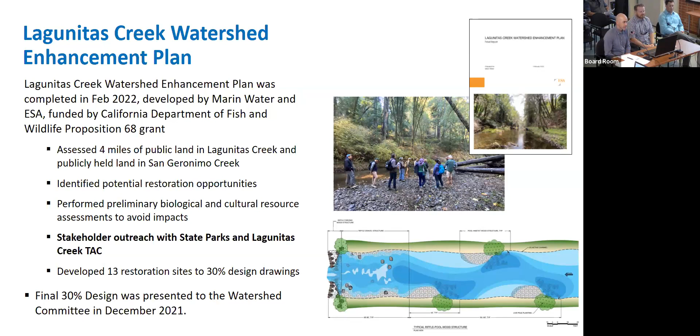Since that time, we've been advancing the design to the 65% stage. We're here this evening to provide you with an update on that and also to advance our CEQA evaluation for the project, which we'll speak to later on in the presentation.

So just a reminder, what is this project? It's about restoring habitat within Lagunitas Creek. We're really focusing on 3 listed species: coho salmon, California freshwater shrimp, and steelhead, as well as other aquatic species.

There are 13 sites mapped out here on the right-hand side. This would restore 4,550 linear feet of channel at the end of the project, and it would entail installing 269 logs, 10,000 tons of gravel, and creating 9 riffle pool wood structures, 1 tributary confluence modification with riffle pool wood structures, and 3 gravel augmentation sites. We'll get into detail on what that looks like in our design as we advance through this presentation.

The real novel approach to restoration that we're doing here is the gravel augmentation. We have not done that in Lagunitas Creek before, and it's an exciting advancement in our restoration efforts.

So Lagunitas Creek is identified as a priority watershed for recovery of endangered Central Coast coho salmon. This is in part because 55% of the spawning habitat upstream of Kent Lake has been impacted by the dams we have in the watershed.

We know that dams do a couple of things: they block the input of sediment as well as wood, and that's important for helping create spawning habitat and rearing conditions downstream of dams.

So we're really looking at reinstalling some of those features into the system to help drive those physical and geomorphic processes. One of the studies we're relying on to inform this design is the Stillwater Sciences Limiting Factors Analysis done in 2008, which identified a lack of wood and gravel in this system as a function of dams within the watershed.

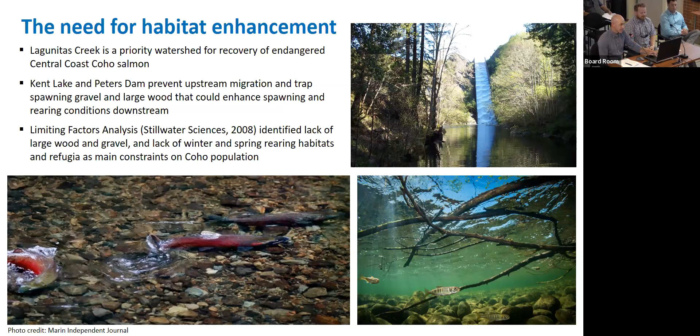So the project is hoping to target winter and spring rearing habitats through these improvements, hopefully improving conditions that are constrained for coho populations within the system. Another study driving our design process is the State Regional Water Quality Control Board.

The San Francisco region looked at other coastal range watersheds and identified natural wood loading levels. For this system in Lagunitas Creek, they recommended that 10 logs per 300 feet would represent a natural loading process.

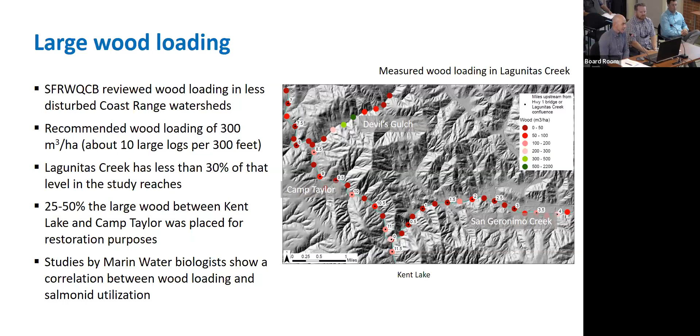Our fisheries department does large wood surveys within Lagunitas Creek and San Geronimo Creek, and the map identifies what they've found through those surveys. There's only about 30% of the amount of wood that should be in there, and of that 30%, 25 to 50% was put in by past restoration efforts from the district and other agencies. So there's a need to increase the density of wood in the system and address the gravel deficit through these projects.

So what do you get when you don't have that wood in the system? You get a homogeneous channel, really shallow conditions, long glides, like a bowling alley. There's not a lot of complexity, not a lot of storage of gravel. These are the conditions we're trying to change through implementing these restoration efforts in the watershed.

Now, to do this, we have to go through CEQA and the environmental review process. California recently developed a Cutting the Green Tape initiative to streamline and increase the pace of restoration within California. We've been working with the California Department of Fish and Wildlife to conduct an assessment through a statutory exemption for this restoration project, and they've identified it as a model project for this exemption process. They've worked with us to develop this, and it's been helpful not only in streamlining the planning effort but also resulting in savings to the district of about $200,000 in work we would have done had we completed a full-blown CEQA analysis.

That's an important step for us, and we'll be bringing a future board item to take action on the notice of exemption to comply with this CEQA process and the concurrence that CDFW has to provide. This will also support the advancement of our project permits for the resource agencies so we can begin implementation.

The initial designs we've been working on, up to the 30% stage, were funded through CDFW's Proposition 68 with $300,000. We've implemented all of that grant-funded project and closed out the grant. We got a second grant from CDFW for $800,000 to advance phase 1 to the 100% stage.

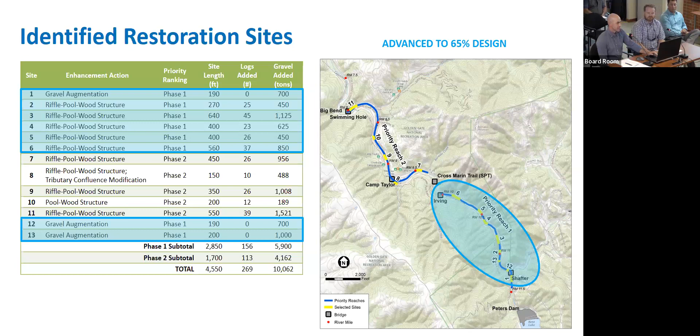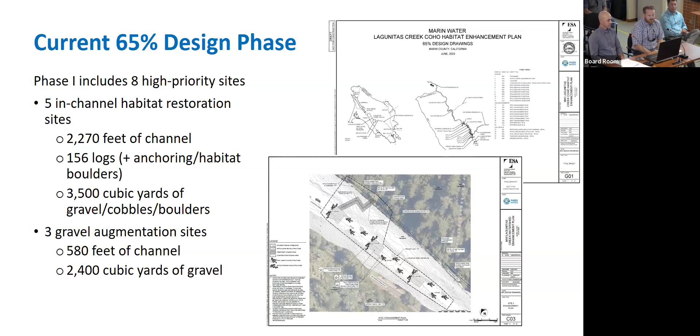There are 8 sites total that we've advanced to the 65% design level, representing a lot of additional wood and gravel to the channel. This channel is starving for both of those things, and the idea is to bring it back up to a long-term sustainable level, as Sean mentioned. Significant amounts of material are going in, and this really builds on the district's long history of doing work in Lagunitas Creek. So this isn't a new approach—it's taking what we've done historically, filling in the gaps where we weren't able to work previously, and increasing the magnitude of the work.

Right now, where we are in the process, just to put it in context, 65% design is we go 30%, 65, 90, and then 100. So we're more than halfway. There's quite a bit of detail that we'll talk about, but we're definitely still looking for input.

We just had a meeting with the Lagunitas TAC today to review these designs, and we've been getting good support from them. They're fully supportive of the approach that we're using. And the approach really consists of 3 primary components.

The first is adding what we call a riffle forcing structure. These are designs that ESA has come up with, and the idea is to apply these same approaches at various sites throughout the restoration reach. A riffle forcing structure is basically 2 big logs coming together, forcing the flow into a central funnel shape.

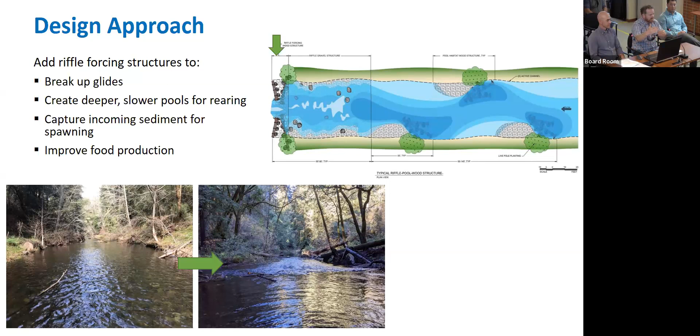That does a couple of things. It breaks up those long glides that Sean showed you a picture of and creates riffles. It stores gravel and essentially takes those long, maybe 200, 300, 400 foot units and breaks them up into smaller chunks that are more favorable for fish.

The second component is adding cover and diversity within the pools created by these riffle forcing structures. They create smaller units, and within those units we add wood on the sides—these are the actual structures, alternating from side to side—making the water flow sinuously and creating more diversity of hydraulics.

And food productivity and all of the other things that indicate to us that it's good habitat for fish. So we're really trying to find the places in nature that are functioning and copy it as much as possible, then set it up for nature to take over and keep these things going long term.

The third component is something that hasn't really been done in Lagunitas or really any coastal stream of this size: adding gravel. There's been a lot of gravel deficit since the dams were put in. You could place these structures without that gravel, but it's really the foundation that keeps the stream ecosystem going, so we're actually enthusiastic about that component.

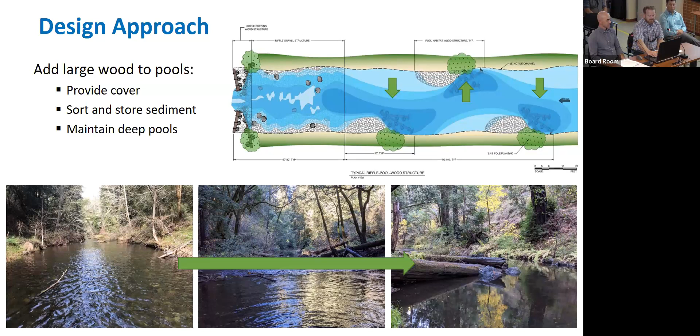These are the riffle forcing structures that we would be placing, 3 of those across. So essentially, you can think of this as a long existing flat bed of the channel without any features, and we're creating a series of gradual steps and smaller units that are favorable for fish.

Over time, we really hope fish will choose to spawn in these areas because they're designed to capture the fine gravel we're putting in. I shouldn't say fine, meaning small—I mean fine quality, basically marble to golf ball size material.

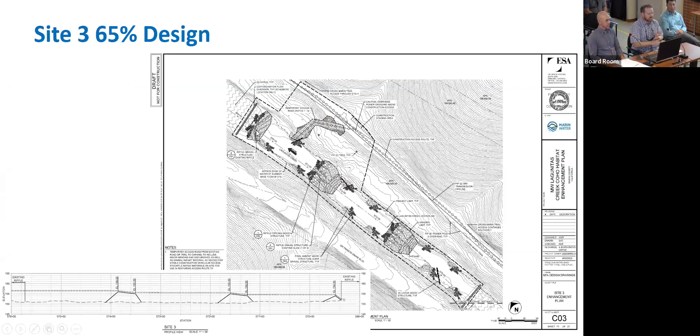And you can see that it's the same approach at these other sites. This is site 3. It's very redundant perhaps, but also very efficient. So once these designs are in place, we can then apply them to other spots. And again, with the access routes and additional riffles, that's more food production, that's more spawning opportunity. It's all of those things that we're trying to achieve in the creek.

This is kind of a detailed diagram just showing what these structures look like. So looking at it from overhead view and in plan view, this would be the flow coming this way. And you can see how the logs just pinch the flow together, accelerate that water, create scour downstream, and also retain gravel on the upstream side. So a fish would be spawning sort of right up here, and then we get a nice pool forming down below. And the same thing, you can see it here in elevation view.

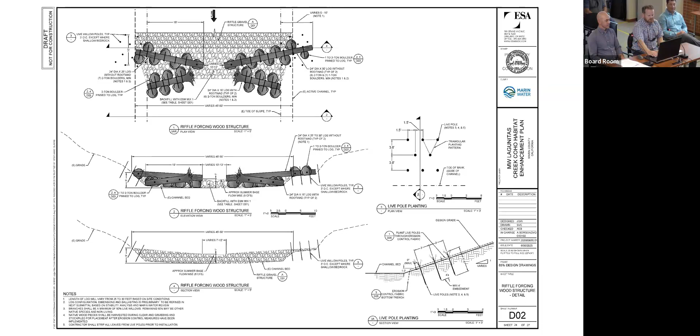So these are the approaches that have been put forward. These are pretty standard. You can see the logs are actually ballasted with very heavy boulders. There's very shallow bedrock in this area, so we were pretty limited in terms of anchoring methodologies. But each one of these is engineered carefully. Jason has assured us that these are essentially stable to the design flows, and they're more or less independent. So if one does go, it doesn't take the whole structure with it. Which was actually another consideration.

This was in our first step here during the 30% design development, was just the consideration of downstream risk. Lagunitas is actually a great creek to work in terms of infrastructure. It's on state parks property. It has very little built up around the actual channel. So we're not very constrained, but there are bridges. There are 9 of them. And we've taken some fairly detailed measurements of lengths, widths, heights, and then sized the material appropriately.

And these are diagrams on the left just showing how material has the potential to rack up on bridges. The one bridge that we did identify and we've been talking with state parks about is the Camp Taylor Bridge. It's still a big wide opening, so it does not appear to be a major pinch point, but it is the one that did rise to the top of the assessment in terms of risk.

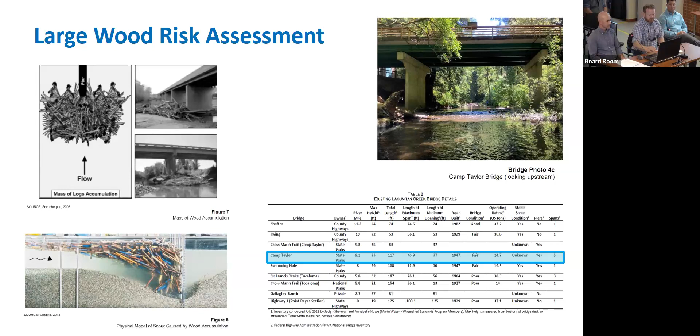Good deal. And so for schedule for this project, we are at 65% design. We hope to be going to construction next summer. We are on schedule to achieve that goal. We've got funding set up to help us initially start implementation.

We're working closely with state parks to consider how we want to implement this project. And we're giving a lot of authority over to them as the collaborator to tell us how much disruption they want to see on a given year. And so this may be a 2 or 3 year construction project, depending on how they want us to phase it. So that's a kind of ongoing conversation that we're having.

We've been very successful getting grant funding for this project, and we anticipate continuing to be. So we are going after all the funding pots that we see available to advance this work. We have to kind of consider and keep in mind the time frame for us to spend that money. And so we're paying a lot of attention to kind of when is the right time to ask for the next funding allotment for this project.

There's also some really interesting gravel augmentation monitoring work in our DWR grant that if we got funded for. So that will be part of our implementation, is actually doing some monitoring of the augmentation approach to see how functional that is. And ESA is helping us develop kind of a monitoring methodology and plan to guide that. So with that, tonight is just an informational item. We've provided the 65% designs as an attachment to the staff report.

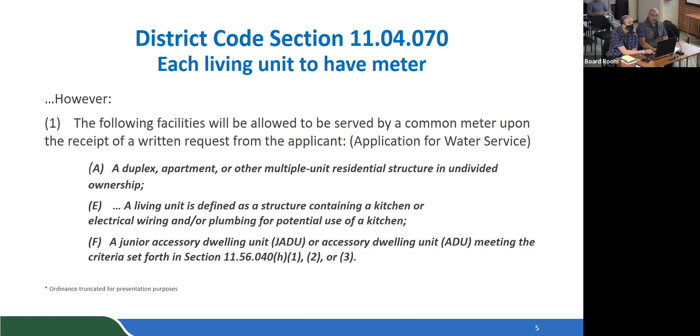What we know so far is that each living unit is required to have its own meter. An ADU is considered a living unit, but the code does allow, as we see here in section 11.56.040, for an alternative approach. So as we point to that section of the code, that will also help us answer our biggest question number 2, if you remember what that was - does the district require payment of a connection fee for a new ADU? So let's dive into that section of the code.

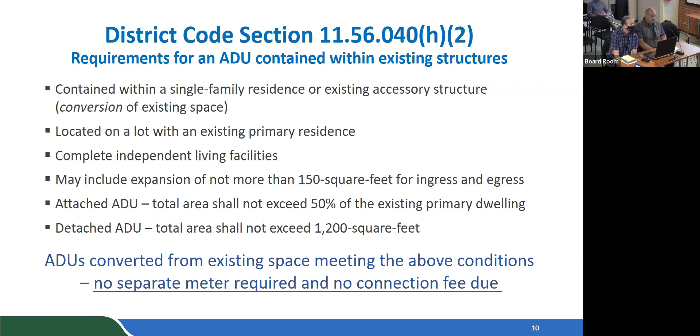A lot to digest here, but the summary is: when we're talking about a conversion of existing space, no separate meter is required and no connection fee is due. This is actually state law—this is in compliance with state law that prohibits the district from separate metering or charging a connection fee for this type of ADU.

So now let's take a look at the next type. Our next type of ADU here is newly constructed ADUs. Newly constructed attached ADUs will allow expansion beyond 150 square feet, and attached ADUs still shall not exceed 50% of the existing primary dwelling. This type of detached ADU must have complete independent living facilities on the same lot as the existing primary dwelling, and detached ADUs shall not exceed 1,200 square feet.

Additionally, ADUs described in this section shall be subject to conditions A, B, and C. And you guys are so excited because I get to do another slide with text. That's exactly right—we got to look at conditions A, B, and C as well, because those are applicable to this type of ADU, the newly constructed type.

Condition A: either the ADU or single family dwelling shall be owner occupied. Both the existing single family dwelling and the ADU shall comply at minimum with water efficiency standards from our Title 13. And the applicant shall be a current district customer who has continuously maintained water service at the parcel where the ADU will be constructed for a period of at least 1 year immediately preceding submission of an application for the waivers set forth in this section.

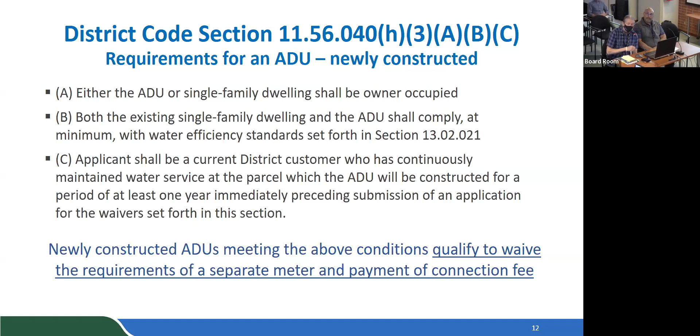So where are we then? What was our goal in this presentation? It was to try to help answer those two big questions. Question number one: do we require a separate new meter for new ADUs? Well, for attached ADUs and JADUs, never—we do not require separate metering of attached ADUs or JADUs.

Do we require separate meters for detached ADUs? Yes, we do, for newly constructed ADUs that do not meet the conditions of the applicable code section. Another way to say that is they do not qualify for the waiver—the A, B, and C section of that code.

So then we come to question number 2: does the district require payment of a connection fee for new ADUs? Well, for the type of ADUs converted from existing space, no—for those that meet the conditions of the applicable code section, which in fact is parallel with the state law.

So the last type of ADU we can look at here—do we need to pay a connection fee for newly constructed ADUs? Does the customer? Yes, for those that do not meet the conditions of the applicable code section—again, a better way to say that is for ones that don't qualify for the waiver.

I know that's a lot of information, and it came pretty quickly. But the ADU laws have been dynamic, as we've seen since about 2016. The district, in fact, goes above and beyond what state law requires—the waiver program in particular.